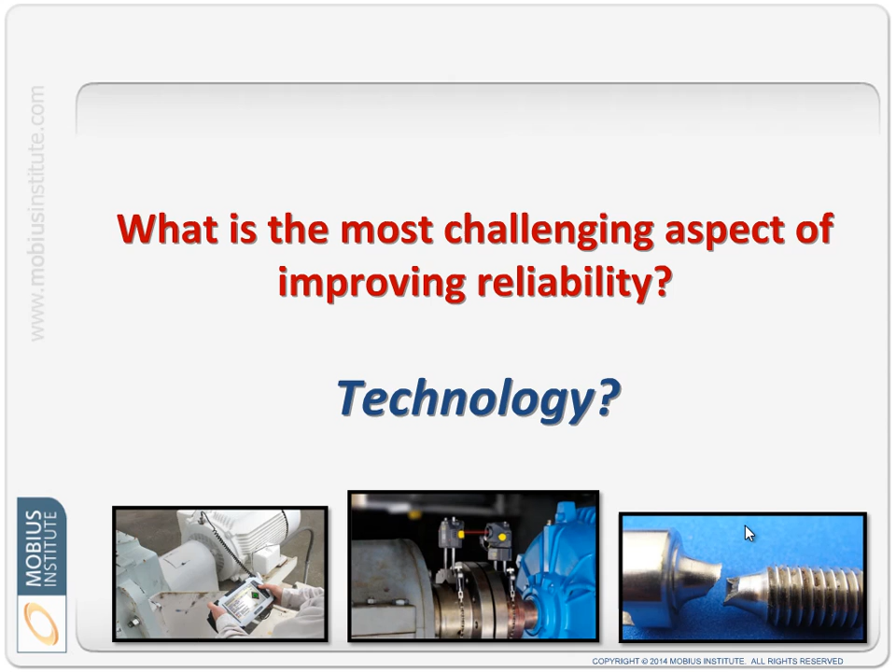Let's have a look at what the greatest challenges are in improving reliability. If you've been to any conference, you'll hear a lot of discussion about the technological challenges, maybe to do with the condition monitoring techniques, maybe to do with the precision skills that are required, maybe in the understanding of failure and why, for example, a bolt failed or something like that. And there's other technical areas. And yes, there are challenges associated with understanding those technologies and mastering those technologies and implementing those technologies. But I don't believe that's the biggest challenge or the most important challenge.

Then there's the challenge of executing programs like RCM and implementing failure modes effects analysis, implementing root cause failure analysis, and understanding reliability and mean time between failure and all those sorts of things. Yes, there are certainly challenges in those areas. Yes, lots of programs failed because people have tried to implement classical RCM and not been successful. So yes, this is a reason why programs can fail. But again, I would say it's not the most important issue.

And some people will say, oh, well, the budget's the biggest one. I can't get the budget that I need to make the changes. And yes, it again is a challenge. But there is an awful lot that can be achieved without spending substantial amounts of money.

In fact, in many areas without really spending any money. And I would also argue that the challenges associated with getting that money are less than what I consider the real challenge is, and that is with the people in your organization, the people at the senior management level, the people in maintenance, reliability, production, maintenance planners, and all of those sorts of people, and the people who, as I've described, are at the plant floor.

It is essential that you have people on board with this program at all levels. Now, this particular presentation is associated with people at the plant floor. It is equally important to get everyone else involved with this program, to get their support, to get everyone believing in reliability improvement, everyone understanding how they benefit, and so that the reliability improvement program will succeed.

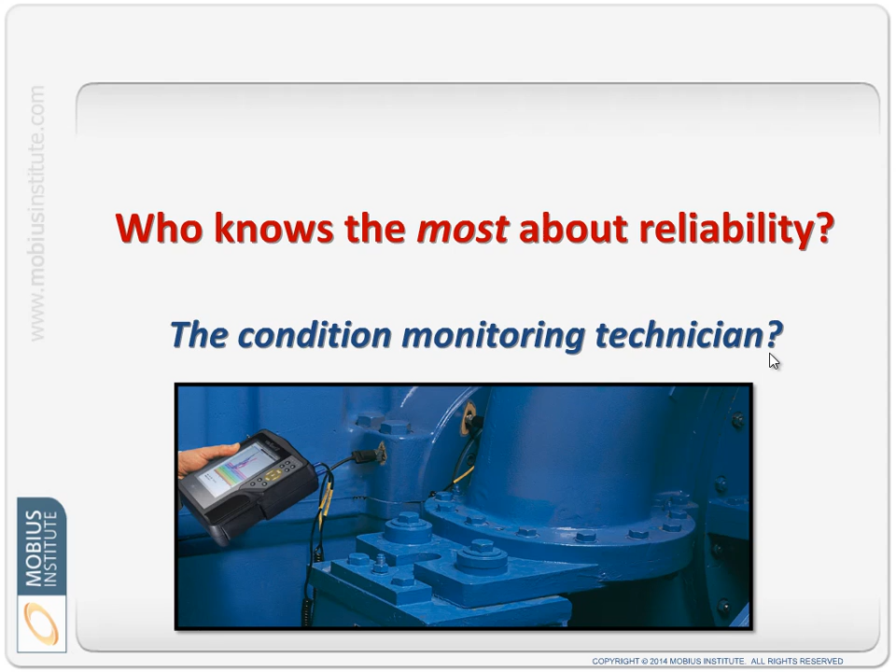No, I would argue, and it's a well-supported argument, that the mechanics, electricians and operators, i.e. the plant floor or shop floor people who spend all their time with the equipment, know most about the root causes of failure. They experience them every day. They see the cause and effect.

They see it, they recognize what the problems are, but they're rarely engaged in the process of improving reliability. People rarely ask them for their opinions, for their suggestions, or for their help improving reliability. Instead, they have probably even attempted to make those suggestions themselves and often just been ignored.

And they say, well, forget it. This is just the way we've done it for years. This must be acceptable. The plant door is still open. It's still an operating organization, so we'll just keep doing it that way. So, keys to success.

Every plant that I have seen that you could call a reliable plant, and no plant is perfect, but every organization that I've seen successfully implement their program has a culture of reliability, has an engaged workforce that believes in reliability. They have received constant training. They have been involved in the reliability improvement process. They have been given responsibility. They have been shown respect for what they know and the skills they have and the contribution they make. Respect is a very important part of all of this.

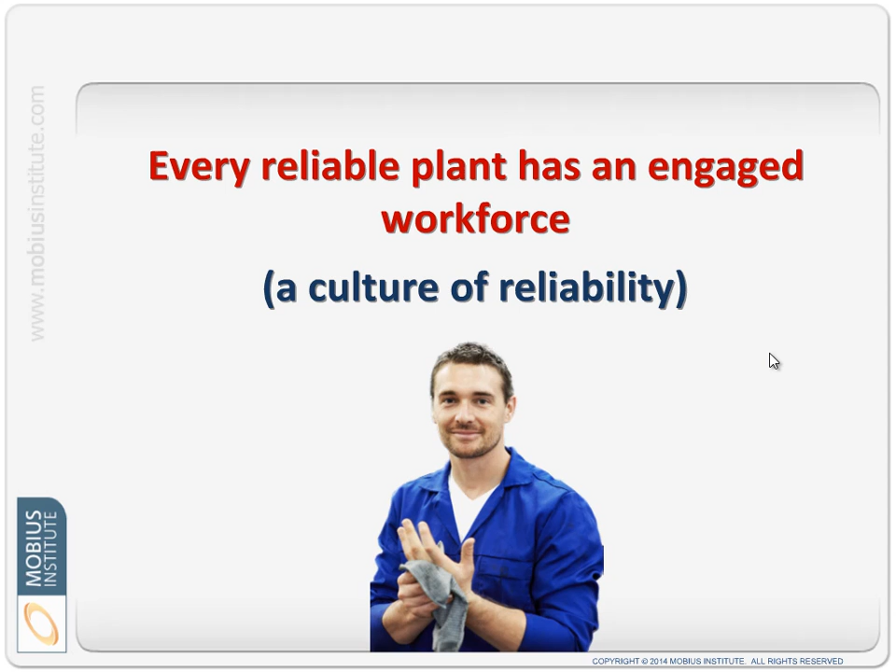But I can tell you that I've seen lots of organizations buy vibration equipment and do root cause failure analysis and try all kinds of things to improve reliability and really struggle, and it's almost like a roller coaster. There's improvements made and then it falls away. Maybe because the champion leaves, maybe there's all sorts of reasons why, but the reliability will improve for a little while, then fall away. The only way to sustain that effort, to sustain the gains made, is to create the culture of reliability, and that's what this presentation is about.

Let's have a look at why we have the problem that we do. What messages do we send people on the so-called plant floor? What is their attitude now? Well, let's face it, mostly they are rewarded for poor reliability. Take the maintenance person in particular. What happens when there's a failure? Are they called in and perhaps earning overtime pay?

Are they rewarded because they are the only people who know how to get a particular type of machine up and running again? Do we pat them on the back and say, good on you for getting the machine going again, for coming in at 3 a.m. or at 2 p.m. on Sunday afternoon? Thanks for coming in. Where would we be without you, Joe or Sally? Where would we be if it wasn't for you coming in and fixing this machine?

Well, what message does that send to that person? They feel good. They have a bit of extra money in their pocket potentially. They're being emotionally rewarded for their efforts. Now, it's not to say that in the future, when someone goes above and beyond and does something to get a machine running again, that we shouldn't reward them and pat them on the back.

However, we need to work so that that is a rare event, and we need to always recognize that, okay, good on you, Joe or Sally, for doing that work, but you know what? We have failed, because that work shouldn't have been necessary. We should be working proactively so that that's not necessary. And people, Joe and Sally and everyone else, need to see that overtime work, that call out, as a bad thing. They want to see that reliability is a good thing. And because of everything that I've just said, clearly reliability isn't important to them for the most part.

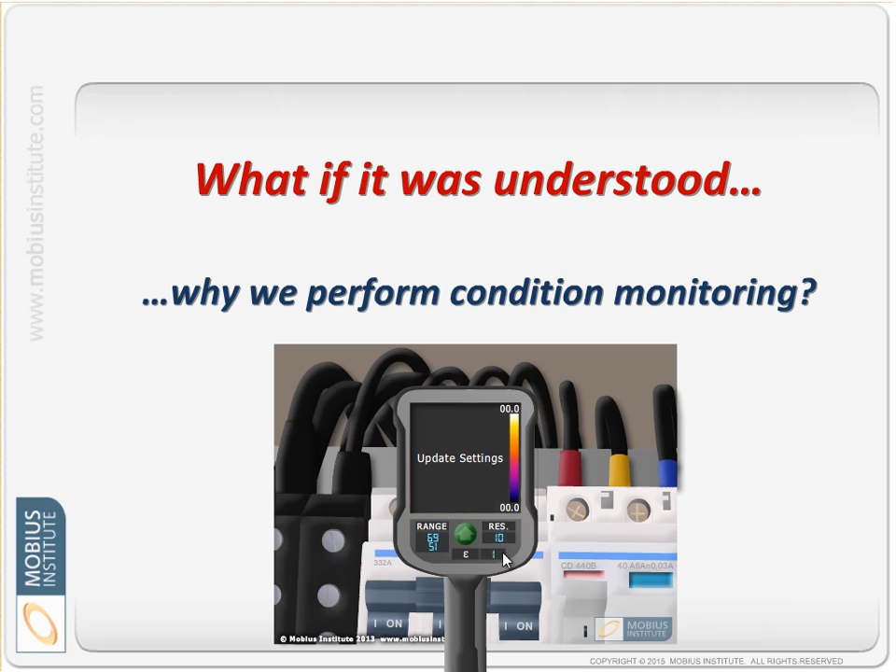So they need to understand why we perform condition monitoring, why someone walks around with a vibration analyzer or an infrared camera as I'm showing here. They don't need to be able to operate the equipment. They don't need to understand all the technical details. What we want to do is demystify it.

So when they see someone using those instruments, they say, fine, I know what they're doing. I don't have to feel threatened. I know why they're doing it. I know why it's important. And the organization has shown me enough respect to actually explain it. Demystify it, say, yep, this is why we do it, and this is why condition monitoring is important.

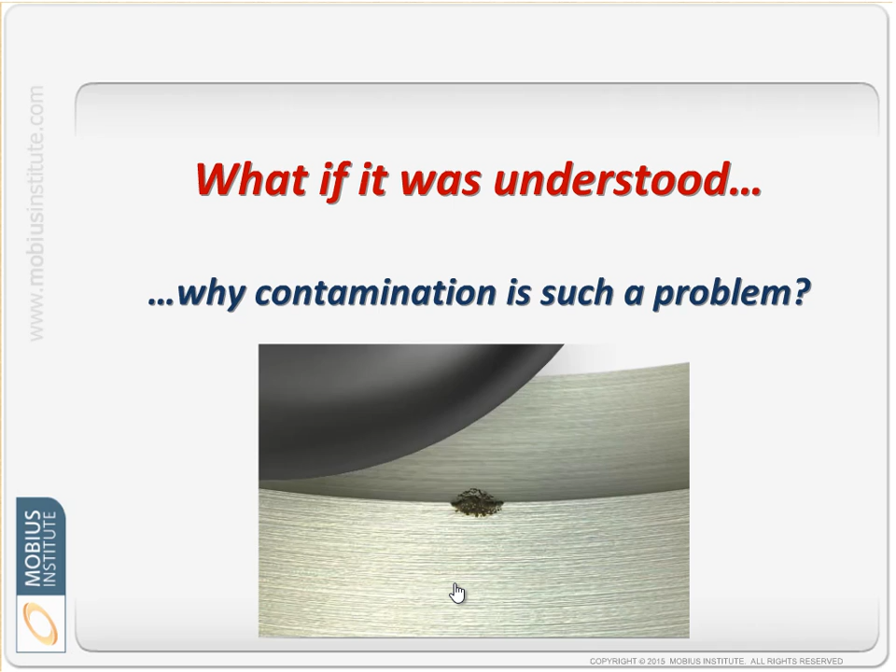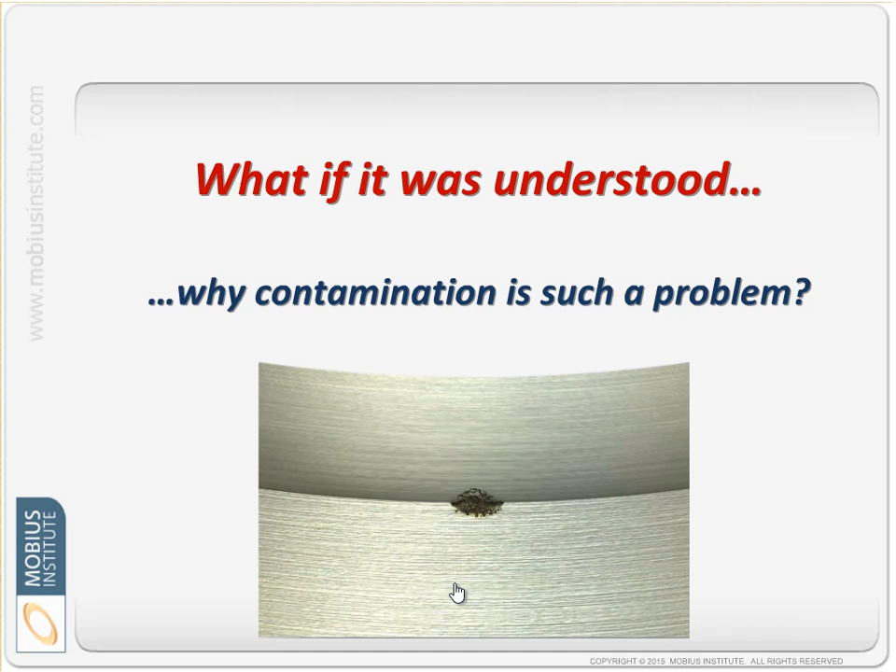They should understand why contamination is such a problem. What happens when tiny particles get into the lubricants? What if water gets into the lubricant? And so again, you can tell someone this is how you're going to do your job, or you can tell them, don't wash down the machines in this way. But if they understand why, truly understand, they're far more likely to follow those guidelines and see other places where, for example, contamination might occur. Again, we don't have to make them masters of lubrication and all of that sort of stuff. It's very easy to get these messages across very quickly.

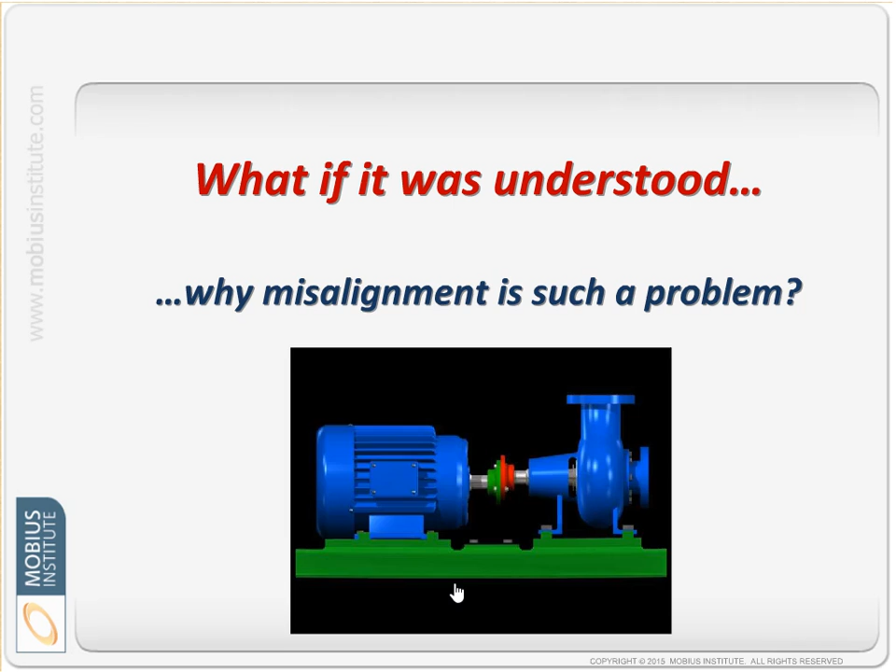Same with misalignment. And again, yes, we will need special training for the people doing the alignment work, but what if everyone understood that misalignment causes the machine to fail? Bearings fail, shafts fail, couplings fail, and so on. It demystifies the issue. It explains why someone is using laser alignment when they see it, and they're more tolerant if the line is down, or if the plant is down just a little bit longer, while someone is doing precision laser alignment. Again, you don't need to spend a lot of time training at this plant floor level, except for the people who actually do the job.

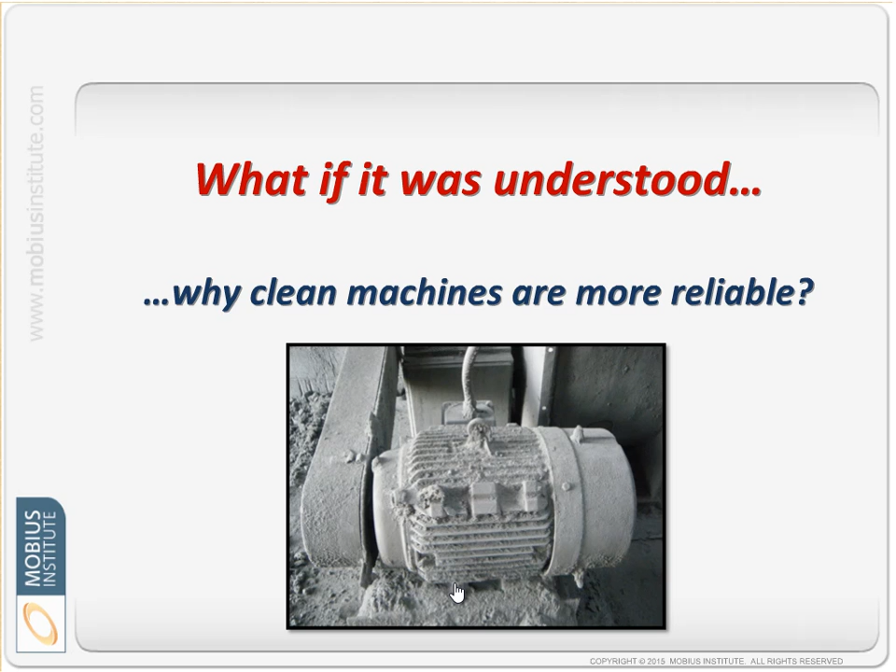Likewise, there's no point just saying, oh, clean the machine. Why? Why do we need to do it? Why is it so important? Why will that motor last that much longer if it was clean and therefore able to lose the heat that it needs to, as against having it covered in cement dust in this particular case?

Explain to operators why it is important that the machine operates within its correct operating window. Now, this little animation I'm showing here explains, we get recirculation, we get cavitation and all that sort of stuff. We don't have to turn them into mechanical engineers so that they understand what cavitation is and all the rest of it. But they do need to see that when they operate the machine properly, it will last longer. It won't be damaged, it won't therefore fail, and all the other problems that ensue.

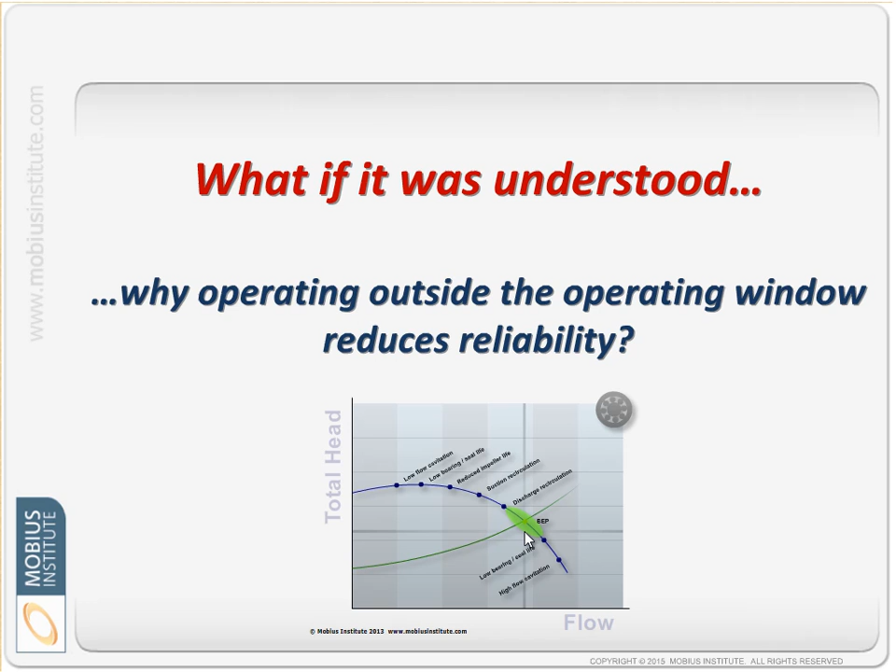And just getting that message across, why it's important to do it right the first time rather than just doing it quickly, whatever the job is, and thinking that you're going to take care of it later, which of course never happens. It's just the job gets done quickly and then you move on to the next job that has to be done quickly and the next job that has to be done quickly. No, we're going to do it properly so that we have fewer failures and thus we have to react less frequently.

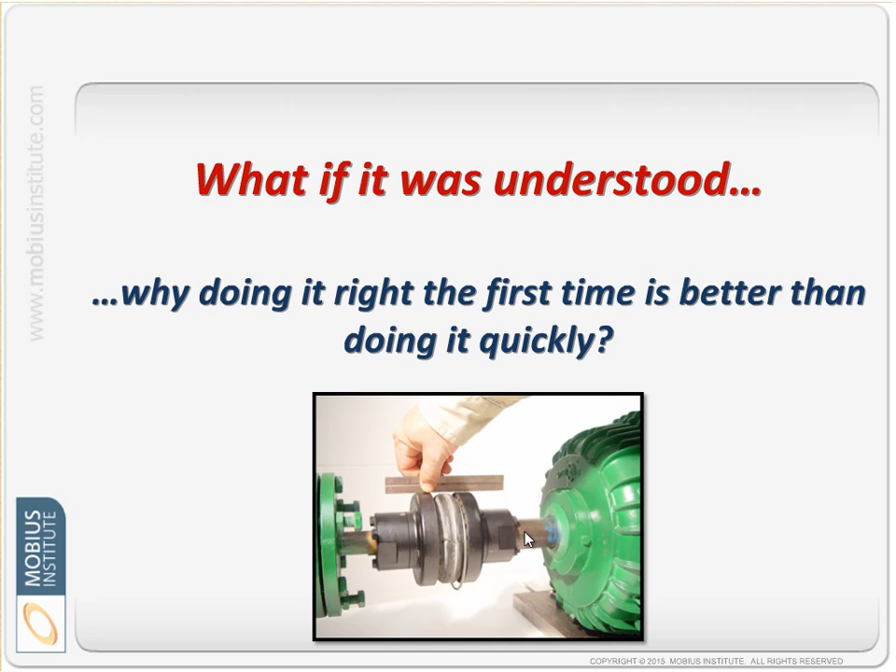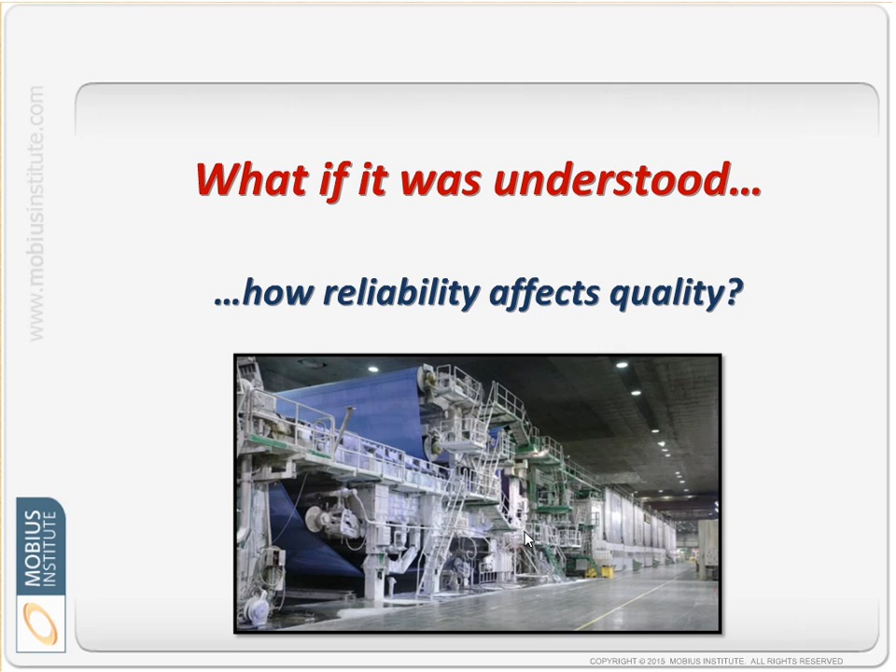And again, I've mentioned it already, we need to relate reliability to safety and just have people understand exactly why that is. And why reliability affects quality. Now again, that's going to depend on your industry, but there's certainly a connection between those two. And in each case, in addition to demystifying the topic, explaining why those changes lead to improved reliability, we want to explain how they can participate and how they can contribute.

So let's just elaborate a little bit on what the education is that is required in order to create this reliability culture. And I'll break it into two parts. The first part is creating the awareness. The awareness education basically needs to cover everything that we've discussed so far. We need to clarify for people what the problem is right now so that they clearly see that the current state is not acceptable and that change must occur. So we're going to clarify what the problem is. We're going to clearly explain the benefits. We're going to demystify the steps to become reliable, and we're going to explain how they're going to contribute.